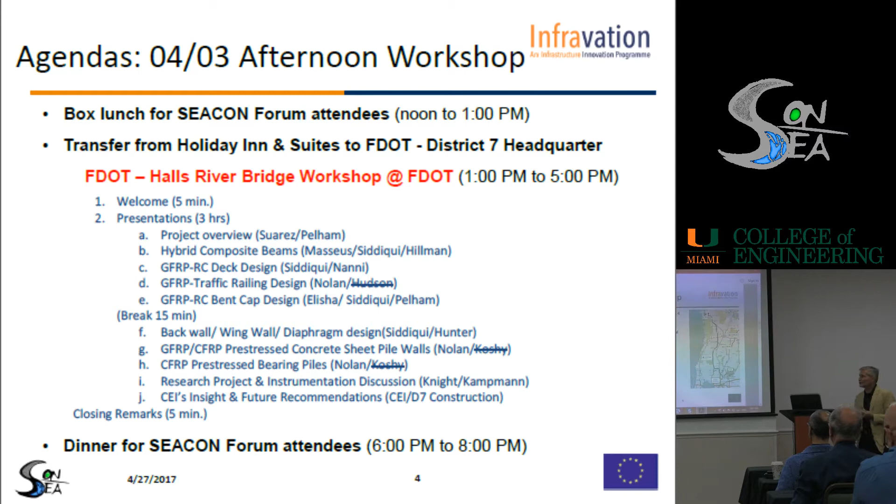So tomorrow, super exciting morning, we are traveling to the site of the Halls River Bridge, and I'm sure that we will all look at the location. It's a pretty long drive, approximately an hour and a half. The idea is just to go there with our own vehicles. So I don't want to spend much time on this. I'm sure that this afternoon we'll have an opportunity to go over it again.

And then finally, in the afternoon, many of you probably don't have much interest in this, but we will have an assessment program. We come back to headquarters of District 7, and the late part of the afternoon, the one indicated as open, is the part that you can attend, the debriefing.

If you wish to be around, great. If not, for the SEACON members, I will give you an update myself at the next monthly meeting that is coming. So with this, I conclude the first part of my outline. I wanted to give you a sense of what's happening in the next 2 days so you can plan accordingly.

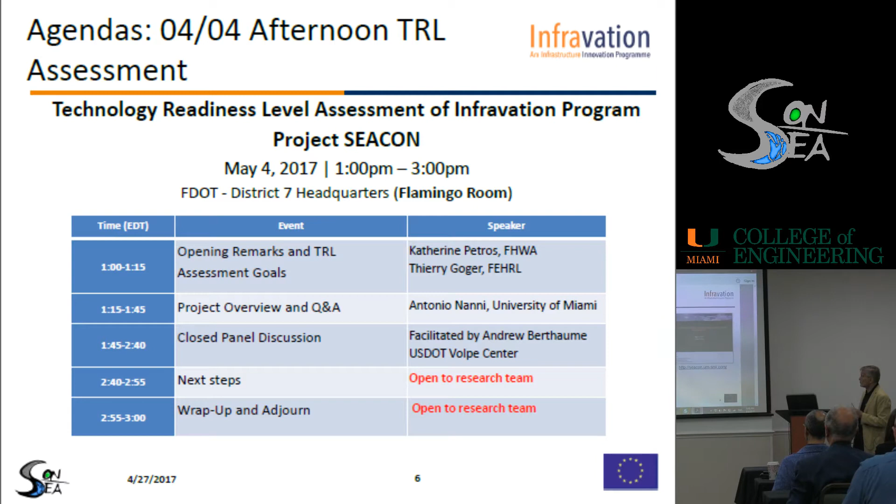Now I want to go into the SEACON project, tell you a little bit about the scope and participants, a little bit about the organization so you better understand the flow of the presentations for the rest of the morning. And then the last slide is more the group, just to lighten up the mood.

So the scope and participants: as you can see from the slide, we have copied this scope directly from the original program. We look at the safe utilization of seawater and salt-contaminated aggregates for sustainable concrete production when combined with non-corrosive reinforcement.

That's a mouthful of terms, but the fundamental issue, if you ask me to put this on a postcard, I would say we are looking at concrete without chloride limits, and making concrete without chloride limits a material that can be used for structures. So it's all about sustainability, and sustainability can be attained by putting together the right two things.

We're delighted to have 9 organizations among the partners and collaborators. And you can see 4 in the US and 5 in Europe. In particular, operations extend not only across the subcontinent but really worldwide.

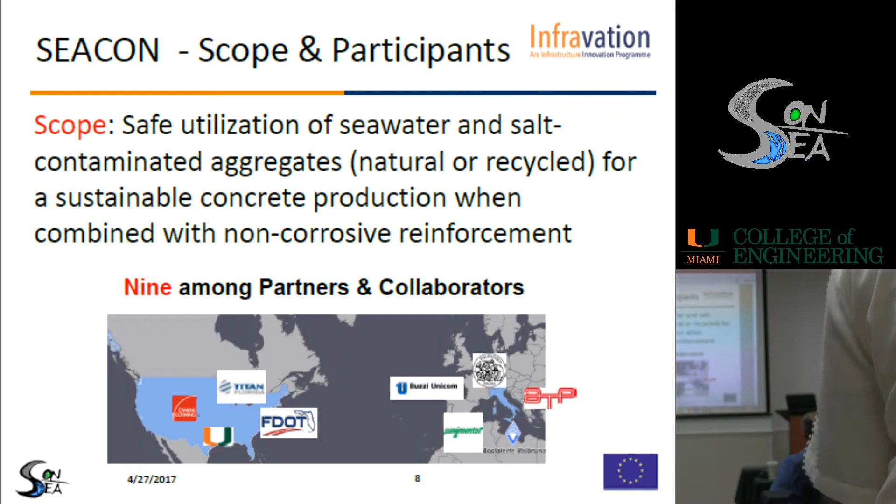This is a very crowded slide, taken from the proposal, but it gives you a sense of the fundamental work packages. In the European methodology of funding projects, the idea of the work package is central to the way proposals and projects are carried out, and we follow the same format.

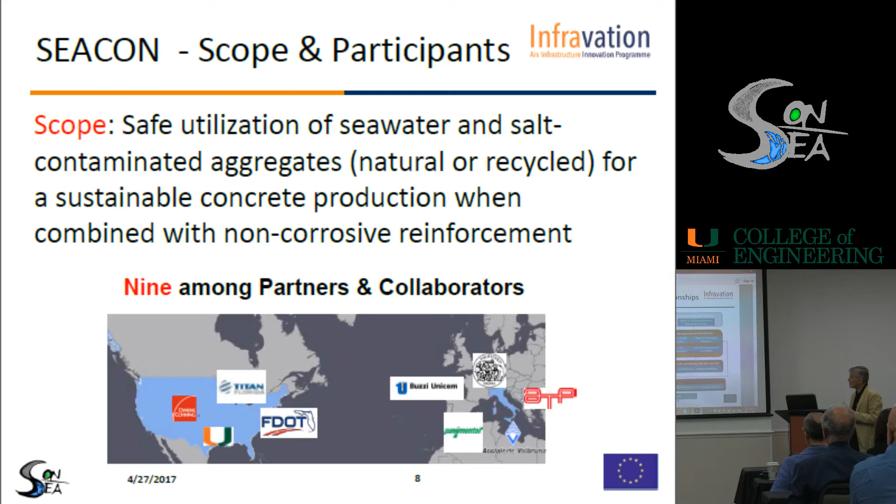So we have WP1, the materials, which is the line above, and then 2 other work packages, 2 and 3, that deal with the reinforcement types, and then WP4 right underneath it, the demonstration projects: one in Italy already completed and under monitoring, and one in the US that is really central to this two-day event. The project in Italy will be presented by Dr. Redaelli later today and deals with the construction of culverts along motorway A1.

And then to tie everything together, we have WP5 that deals with the cost and the life of the structures, and Professor Dotelli is here with us and will give us a presentation. The remaining WPs 6 and 7 deal with management and dissemination, so this is in a sense what we're doing today. This gives you an idea of the timeline. The only thing I want to mention, this is a project that started in October 2015. It will end in March of 2018.

So we are today in the month of May, at month number 20 of the total that we have at our disposal. So we are in the second month of the current semester. So things are converging, and hopefully we are deploying what we have promised.

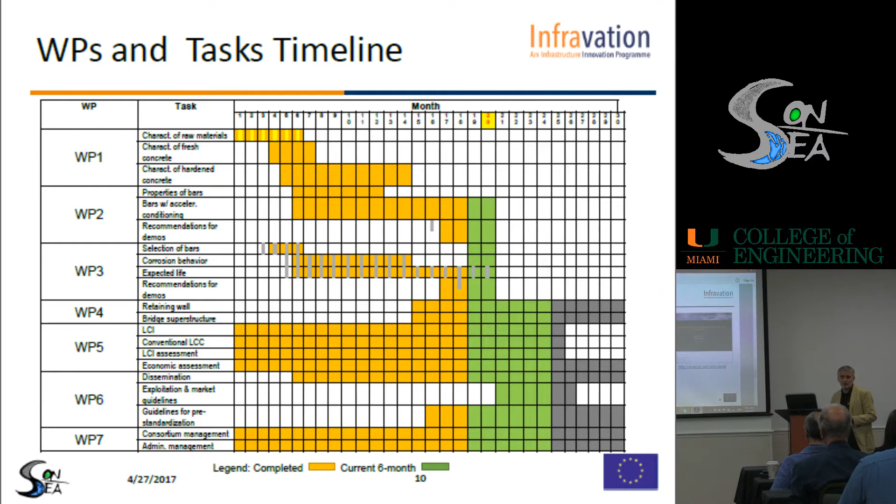The last slide is really a collection. You know that I'm very active in the American Concrete Institute. So one of my dear friends provided me with these pictures. So let me explain the title. Is this an unintended implementation? The point I want to make is we don't have to go up north to see the infusion of chlorides through de-icing salts in our bridge decks.

If you go to this location that is coastal, there is this construction going on, a major structure, with a tide that moves 12 feet. So when the tide is up, and you look at the two pictures on the right-hand side, the foundation is totally covered. And the sticks that you see coming out, these are steel reinforcing bars, black steel. And then when the tide goes down, the picture that is not very clear, taken from a boat from a distance, everything becomes dry.

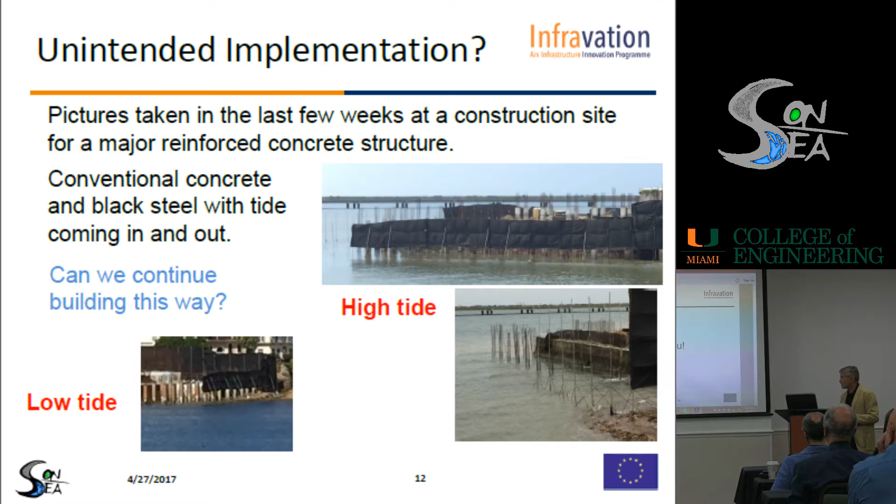So the contamination with the chlorides already happens every day in every structure. What is going to be the life of this? I don't know. If you are in the repair business, you love it. But I think the entire point is what we are doing is really relevant, and I hope that not only with this experience in the next 2 days, but with the follow-up of the work that we have generated, there will be interesting follow-ups. With this, I'm going to close, and we will start with the first presentation.

And maybe Morteza, you want to help with the transition? As I move away, yes, Katherine will come up. You need this, of course. Clip it. So the next, I'll just hold it.

FHWA actually has been extremely active, with colleagues at FHWA, in making this a reality from the U.S. side with Infravation. So we're extremely thankful to her and FHWA for having made this really possible for all of us. Stephanie? Where's the arrow?

So, okay. Well, on behalf of the Federal Highway Administration, I'd like to welcome those of you in the room and those of you online to this forum. I thought I'd just spend a couple of minutes giving a little bit of background as to what exactly Infravation is and how we got here. So Infravation, basically the word itself is a mashup of infrastructure and innovation. And it's a transatlantic research program with the goal to look at advancing innovative near-market materials or processes that are going to make highway infrastructure last longer, perform more efficiently, and hopefully cost less.

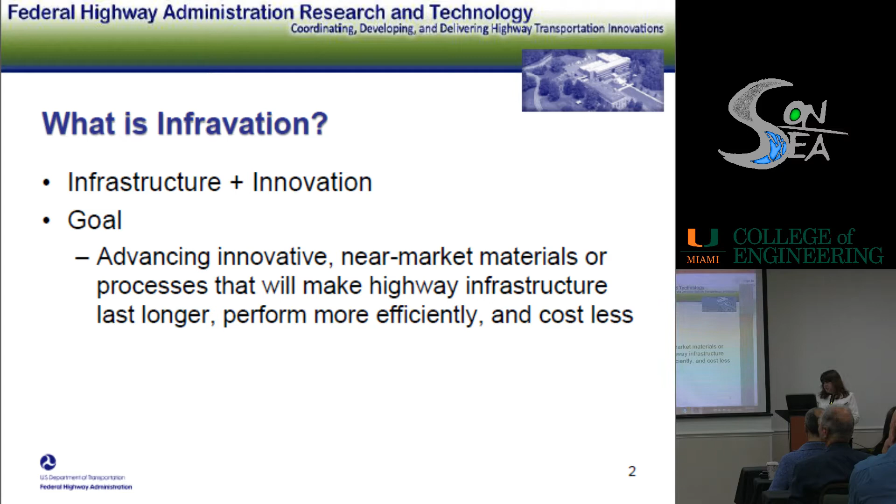So why would we collaborate with the EU? Well, really, highway construction, operations, management, and maintenance is increasingly international. Many of the issues faced on both sides of the Atlantic are common, and there's a lot to be learned from each other. By pooling our resources, we could supplement our own national research budget and the research of the EU road authorities. So we're leveraging limited resources, and it has the potential to increase the scale of the projects that we can complete and increase the potential for success. It also provides access to cutting-edge research from both sides of the Atlantic, so we're promoting knowledge sharing and capacity building from each side.

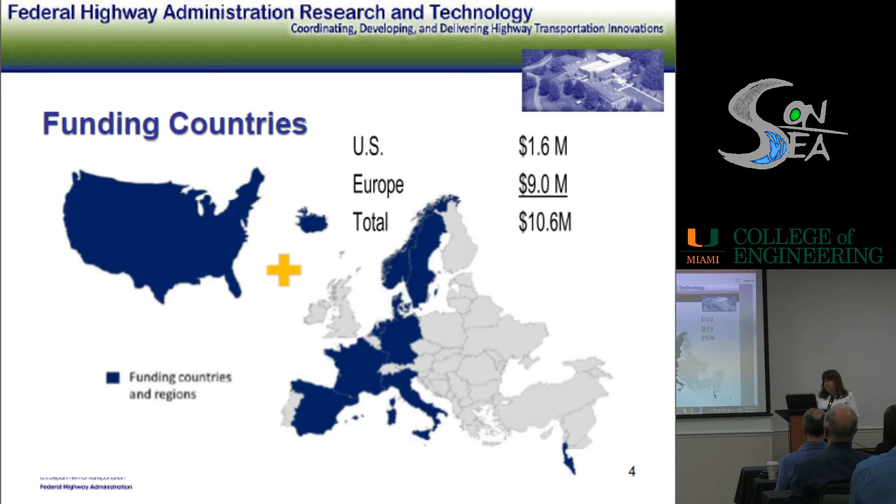So Infravation itself was funded through FHWA in the US, and the countries you see listed here are the European road authorities and the European Commission in general. So we pooled our resources to create a $10.6 million research program. And what's so special about it? This really is a common pot. There was no guarantee necessarily for those who put their money in that their universities or their industry were going to get a return on that.

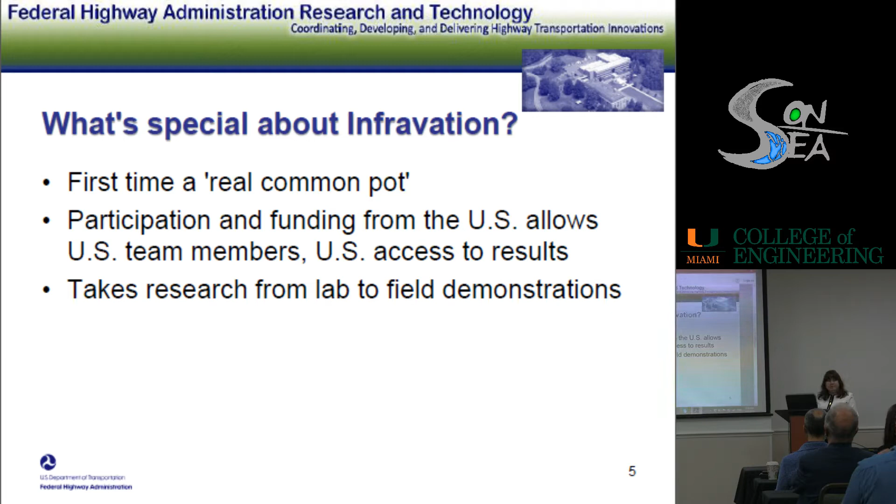The funds were pooled, but by participating, the U.S. was able to allow U.S. universities and industry to propose on projects and have access to the results. And also, Infravation includes an element of technology transfer and an emphasis on implementation. So we'd like to take the research from the lab to field demonstrations such as this one. Some of the Federal Highway objectives in participating are to provide the opportunity for U.S. and European highway researchers to work directly with each other, to assist in harmonizing adoption of new technology and processes, and to provide state DOTs and European national road authorities with common access to innovations.

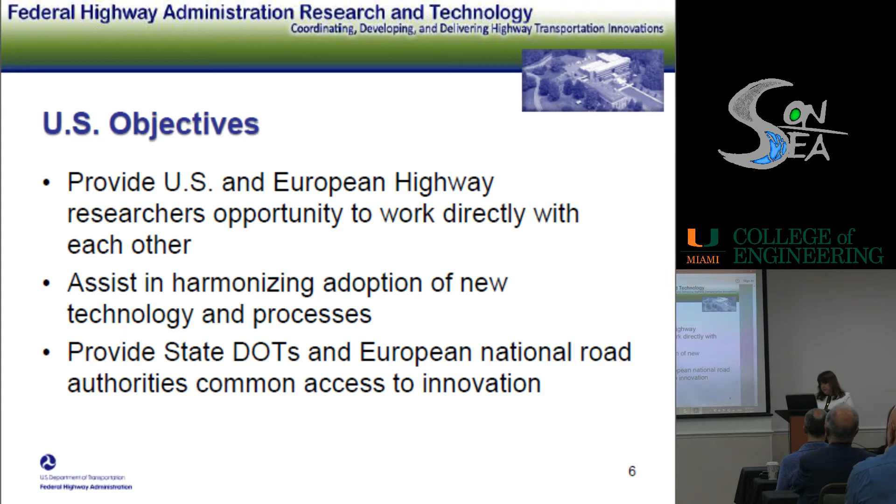So how did we get here? In 2014, based on that $10.6 million pot of money, we issued an RFP, and we received 103 proposals in response. 2/3 of those proposals included U.S. members. Of those 103, nine of them were awarded, and they were initiated in 2015. Of those 9, 7 included U.S. membership. And then SEACON is one of those 9 projects that was awarded.

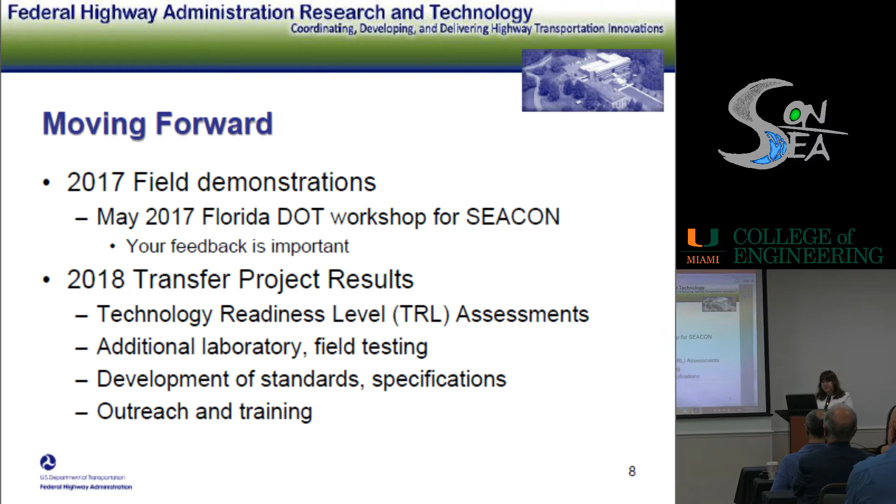And then, as Tony mentioned, there's also going to be a formal technology readiness level assessment following the workshop. And so combining the feedback we get at this workshop, we'll take an assessment in terms of, is there additional laboratory or field testing that's needed? Can we move towards the development of standards or specifications? And then, of course, continuing outreach and training. So with that, I thank you, and we'll welcome your input.

I don't know if there is any question for Kathy. She brought us back into the good part of the agenda, meaning in terms of the time. I don't know if there is any question for her.

Kathy, the 9 projects, have they already been identified? Yes, they're ongoing. Many of them are in final stages now and wrapping up. So in the next year or two, we'll see the outcomes from those projects. And the technologies are different technologies or all related to the fiber? No, they're across the infrastructure spectrum. So the money is already committed there. Yeah.

Actually, just a comment. We are hoping in a phase 2 of Infravation. That doesn't guarantee anything to the existing program, but I think it's a very exciting idea. And if you go to the Infravation website, you will see a host of activities. Yes, infravation.net.

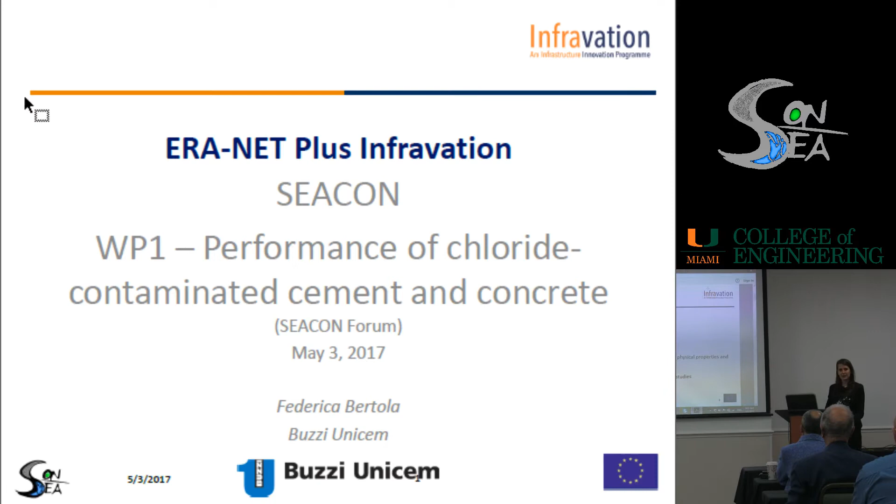Okay, good morning all. My name is Federica Bertola from Buzzi Unicem, and I will present you today the WP1 activities and results, particularly related to the chloride effect on both cement and concrete. So the following are the outlines of my presentation. The main duties that Buzzi Unicem has in the project, a brief overview on the European standard related to cement and chloride limits, then the cement that we produced for the SEACON project, the effect that chloride has on the cement hydration, on the physical properties, and on the microstructure, a very short introduction to the ongoing durability studies, and finally the conclusions.

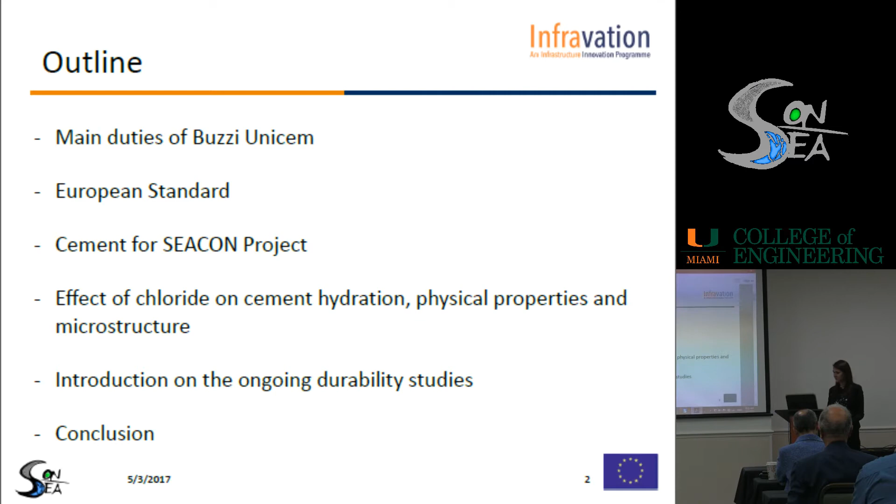The main duties that Buzzi Unicem has on this project are, first of all, the production of a dedicated cement for the project, and obviously its characterization, the understanding of the effect that chloride from different sources can have on both cement and concrete, the project of different mix designs for the demonstrator construction, durability studies, and taking part in the Italian demonstrator.

First of all, a brief overview of the European standard to understand the difference between the European regulation and the US one. So here you can see the table with the 27 different cements produced and regulated in Europe. They all include different and variable amounts of clinker, gypsum, and other supplementary cementitious materials that can have or not hydraulic or pozzolanic activities, such as blast furnace slag, silica fume, and so on. So in Europe, there's this trend to add materials during the cement production.

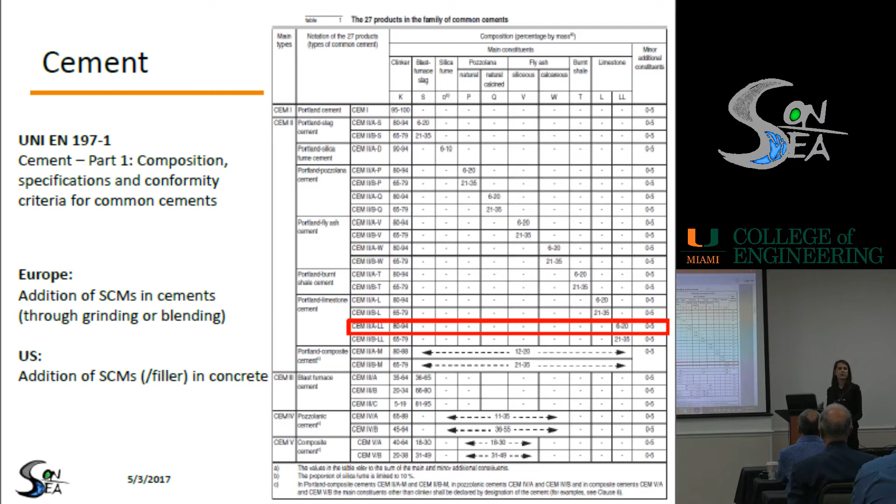And here, the red highlighted item is the CEM II/A-LL, the Portland limestone cement that is considered for the entire study. Another important thing in the European regulation is the chloride limit. We have a chloride limit equal to 0.1%, and it's different from the US because you don't have a limit. So this is particularly important for cement producers because we have to control carefully the production of cement to not exceed this limit.

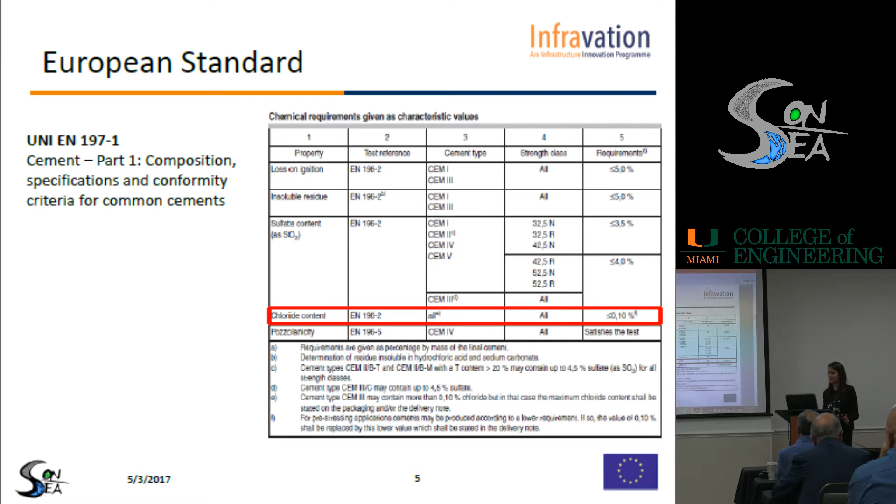So in particular, when we use waste material as an addition in cement, we have to control carefully this limit. So here, the two cements that we consider in the study: a reference cement, a Portland cement CEM II/A-LL 42.5, that is commonly produced and sold in Italy.

Then SEACON cement. We produced a dedicated cement, as I already told you, for this project, using in this case cement kiln dust in partial substitution to natural limestone. In fact, this is a waste material coming from cement production, and its reuse is limited by its chloride content. In fact, you can see from the table that SEACON cement has a chloride content of 0.23%. The limit is 0.1, so it exceeds the limit, and is much higher compared to the chloride content of the reference cement, that is 0.02%.

So we performed the characterization of the two cements to understand the effect of this very high chloride content, and we can see that the main effect is on the setting times. So we can say that the high chloride content can have an acceleration effect in this case. But we decided to continue this investigation, so we produced pastes, so cement plus water, and we considered the two cements with both fresh water and seawater to understand the effect when chloride is present in water, in cement, and in both water and cement.

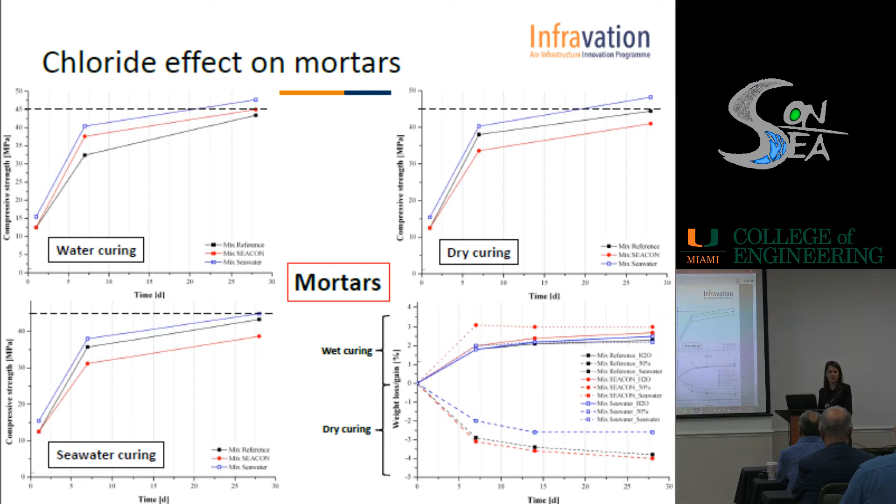As we can see from the graph, the chloride effect on the compressive strength is not so important, except for Mix SEACON. In fact, in this case, when chlorides are present in the cement, we have a slight decrease in the compressive strength, particularly in the case of seawater curing. And this could be due to the higher absorption of water that you can see from the fourth graph. Then another important thing is that, considering the loss of weight in dry conditions, Mix Seawater has the lower loss of weight. Maybe this is due to the fact that the pores are full of salts in this case, and so the loss of water is lower compared to the other two cases.

Then we designed the different mix designs, three in this case: Mix Reference, Mix SEACON, and Mix Seawater. The first one as reference, with reference cement and fresh water. The second one with SEACON cement and the addition of superplasticizer, and Mix Seawater that needs also a retarding agent due to the acceleration effect of chloride. We designed them considering a fixed compressive strength of 45 megapascals at 28 days and also the desired consistency.

Another important property to check is the drying shrinkage. So we performed it in both concrete and mortars to have a comparison. We produced samples, cured them for 24 hours in wet condition, 95% of relative humidity, and then we stored them in dry conditions to see what happened.

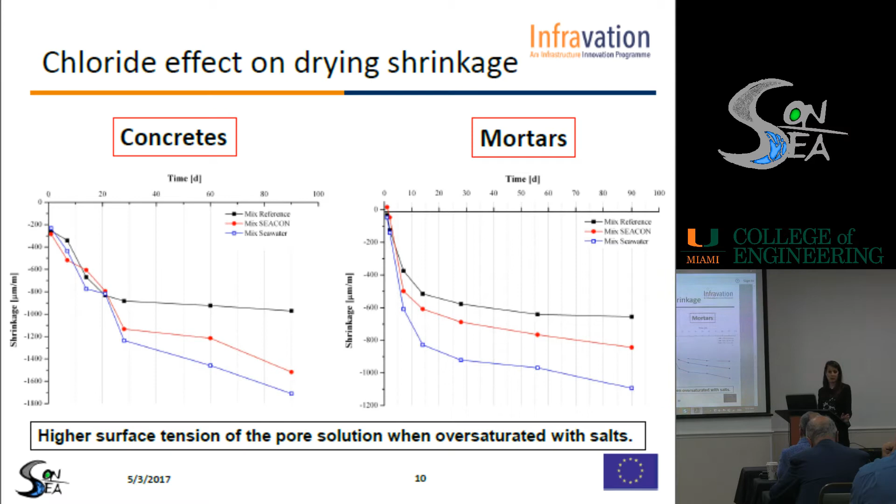We decided also to have some information about the microstructure to better understand this behavior, and so we considered two different techniques, the SEM and the MIP, to understand the microstructure and the distribution of the pores inside the material. So we produced the same mortars that I told you before, so mixed reference, mixed seawater, and mixed SEACON, and we stored them first in water for all the time that we performed the investigation.

Then we produced the same mortars and we stored them in dry conditions at 50% of relative humidity to see what happened. And from the pictures you can see that the mixed reference has also in this case the best structure. So the hydrated phases are recognizable also in these cases, but the structures are different from the other one. So we performed MIP also in this case, and we can show that mixed reference and mixed SEACON have a bimodal distribution. They have two different families of pores in this case.

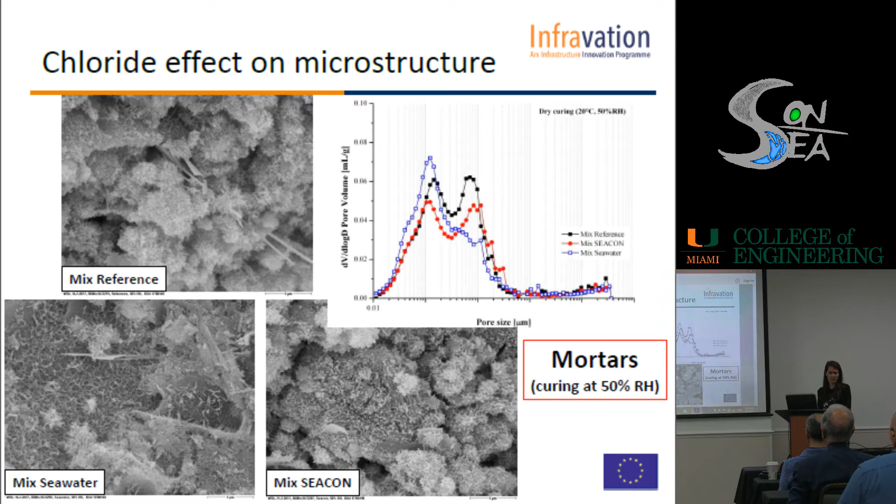The first one is around 0.01 micron and is typical for this type of materials. Instead, the other one is around 0.1 micron, so bigger pores, and this is completely different from the other case, so water curing, because in this case the development of the hydrated phases is not complete. So the bigger pores are in this case empty, except for mixed seawater. In this case it doesn't have the bigger pores due to the salts that precipitate in them, closing them.

So a brief overview of the ongoing durability studies. We are performing tests on the resistance to sulfate attack, because it's very important to understand if an ionic exchange between chloride and sulfate can happen. Then we are checking if an alkali-silica reaction can occur, because alkalis are present in both seawater and in kiln dust, so we would like to check if it can occur.

And then a leaching analysis. This is important to understand if a concrete contaminated by chloride can also contaminate, with a release, the surrounding soils, and so the surrounding structures, probably with corrodible steel as reinforcement.

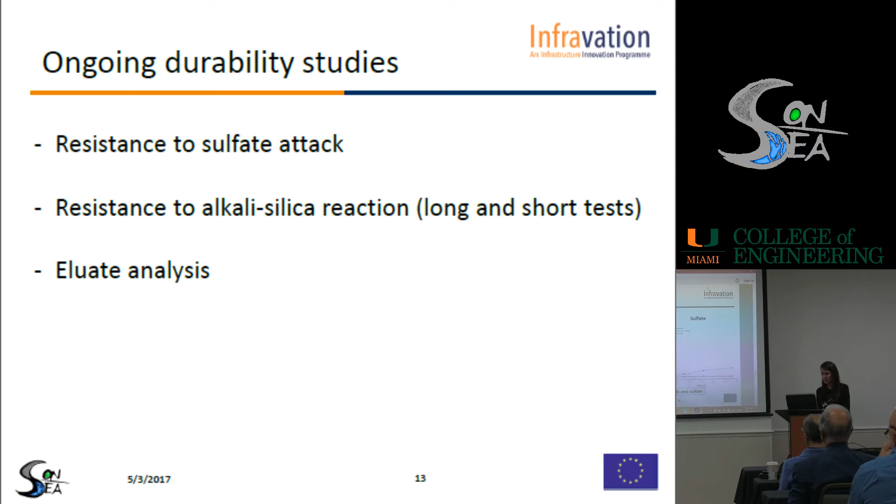So we performed this test producing the 3 concretes that I told you before. We produced cubic samples. We stored them for 28 days in a wet room, and then we submerged them in a fixed amount of deionized water. And at different times, we extract the water, so the contact solution, and analyze through ionic chromatography the release of chloride and sulfate in water.

Instead, for sulfate, this is different because we have to consider the possible ionic exchange between chloride and sulfate. So when chlorides are released, sulfates aren't, and the opposite, when chlorides are not released, sulfates are. In fact, mixed reference results in a higher release of sulfate because probably they are not bound as in the other 2 cases.

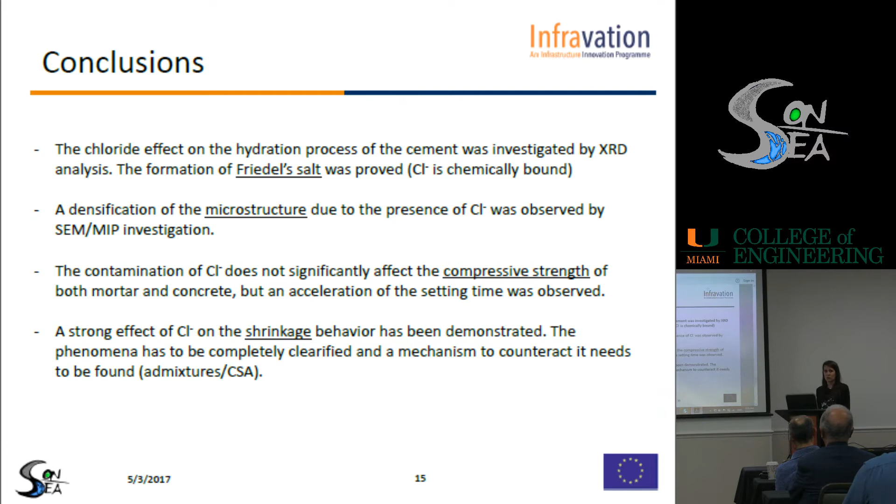We wrote 2 different papers. The first one was published in Advances in Cement Research last June, and the other one will be presented at the 14th International Conference on Durability of Building Materials and Components at the end of this month in Ghent.

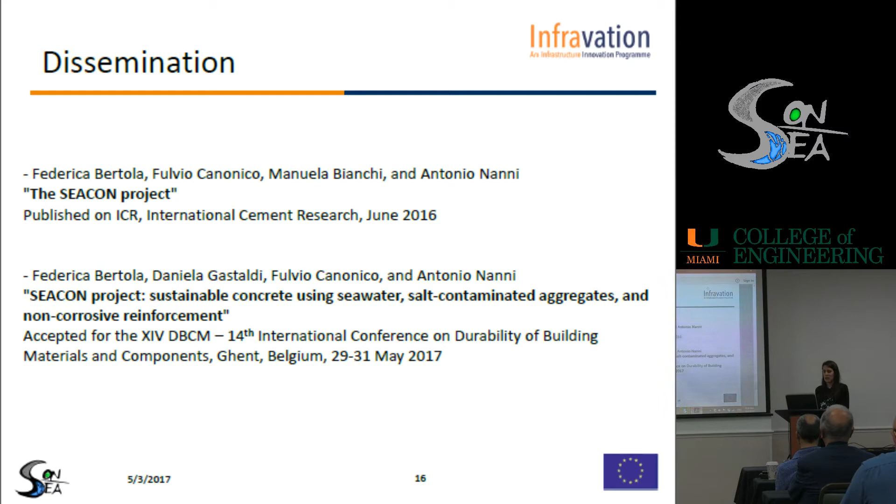The producer told me that I have to be on this side, otherwise I cannot work. So that's the only reason I'm coming. Any questions for the excellent presentation by Federica? There will be a quiz on the chemistry of cement after.

All right. Now, the chloride. I know in this project that we're working on, the Halls River Bridge, we use a fiber rebar, which the chloride should not really be affecting the performance of this material. But let's say we use it with conventional rebar, steel rebar. Would that work in this case with the chloride content? I don't think so. We need to use a different kind of rebar to permit the higher chloride content.

And this is the objective of this work, this project. So it will not work with conventional steel, yeah, because it can create corrosion. Actually, not the next presentation, but the one coming from Politecnico will address this issue of corrosion of black steel or carbon steel in a very high chloride content.

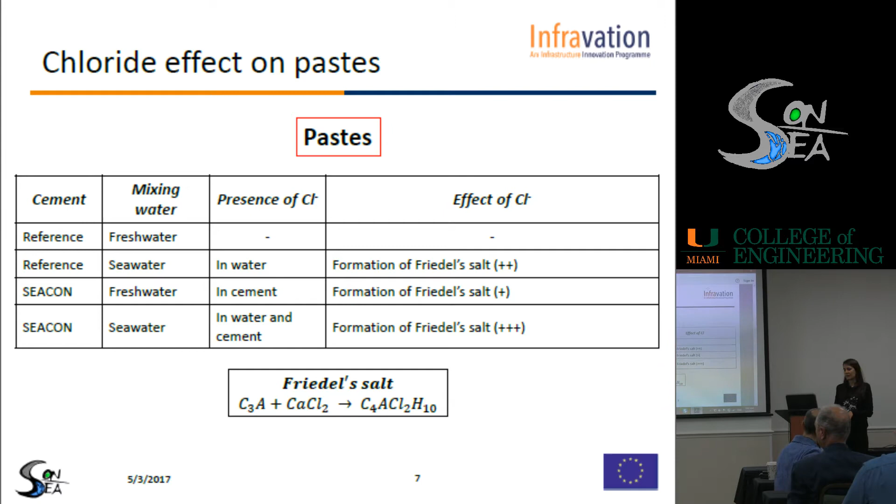Waste materials such as kiln dust, the price is lower. So I think that SEACON cement will cost less compared to the reference one, a normal cement, because we can reuse materials that instead have to go to disposal. No. I think 10% less, but I'm not sure about it. Maybe a question for the producers.

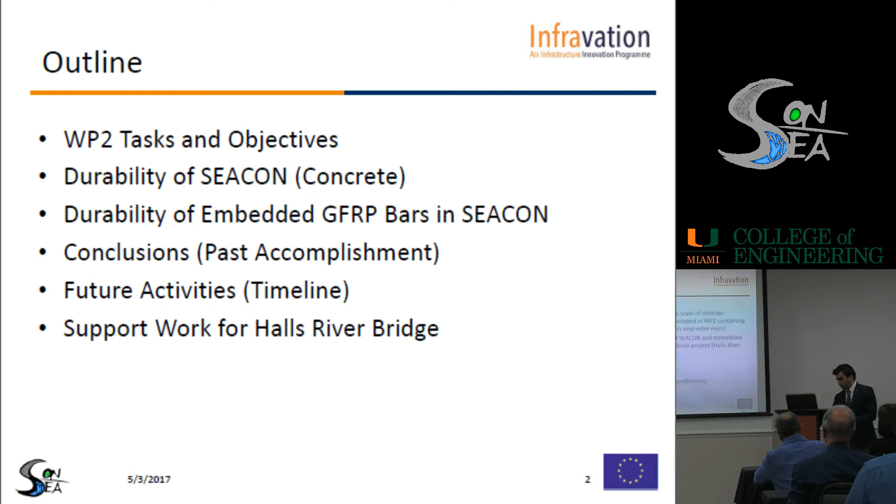Okay, so what is WP2? WP2 is we want to make sure that the concrete that our colleagues in WP1 cast is going to be okay for our GFRP bars. It's going to be good, so it's not going to affect our GFRP bar durability. And the output is going to be an evaluation of the expected life. So we want to make sure that the lifespan of our structure using SEACON plus GFRP bars is going to be guaranteed over at least 100 years.

And then the tasks: the properties of the GFRP bars, for sure the pristine bars, to test them and then use them as a benchmark. And then we actually use reinforced samples using the new type of concrete, which is SEACON, and we're going to see how it's going to perform. And then also for sure we're going to have some recommendations for the demo project, which is going to be the Halls River Bridge.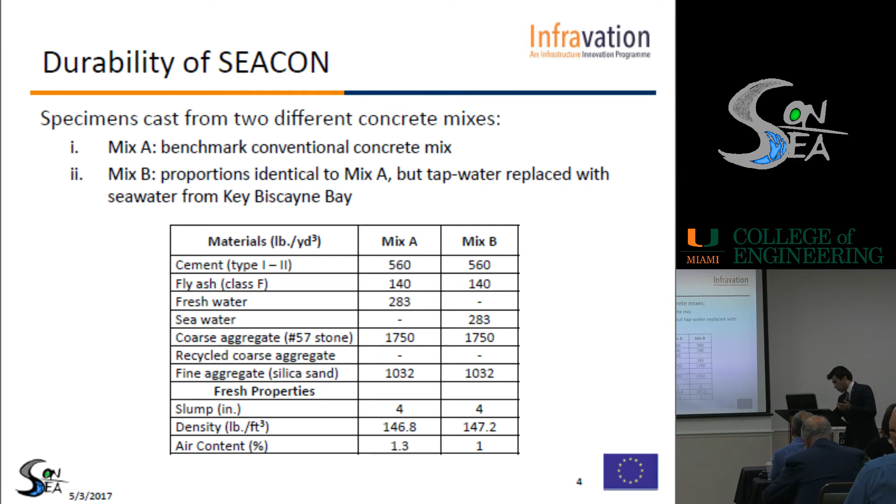And then what we did for mix B, which is our seawater concrete, we just replaced our fresh water in the conventional concrete with seawater. That's the only difference in mix B. But for sure, because of the chloride content of your seawater, it's going to affect your setting time. So you have to use different kinds of admixtures, for example, retarders, to control that. And you can easily do it by using different kinds of admixtures, mainly retarders.

So over here, we actually cast some samples 2 years ago. Before the official start of our project, we cast samples from mix A, which is a conventional concrete, and then mix B. So we cast them, and then we exposed them to different environments to make sure that they are durable in both environments. So the first environment is just outside our lab in Miami, Florida, so basically a tropical environment, and the good weather in Miami, right?

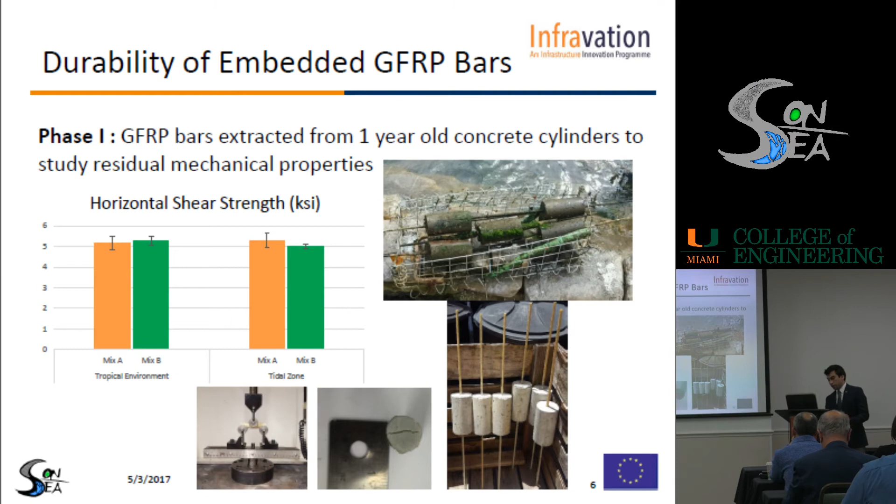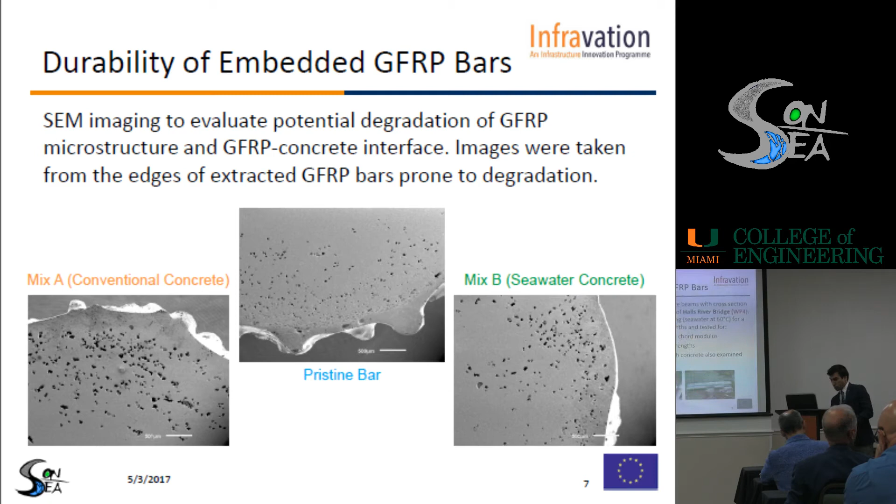So this one was phase 1. Then we officially started the SEACON project in October 2015. At that time, we started casting more samples. We embedded GFRP bars in these types of beams. These beams are about 6 feet long, and the cross-section is 6 by 7.5 inches.

These were supposed to be the same as the test blocks that we have at Halls River Bridge. The main idea was to have some samples in the lab exposed to accelerated conditioning, so we're going to have test results in the lab and also in the field, and it's going to be easy to compare.

And as you can see here, we casted those samples. They have 4 number 5 GFRP bars. And then we expose them to a condition called accelerated environment. And what is it? It's seawater at high temperature, 60 C or 140 Fahrenheit. So that's actually what it does.

If you want to really study the durability of GFRP bars, you have to wait for 20, 50 years, go to the bridge, take your sample, and then test it. For sure, you don't have that much time, right? So the best way is just to accelerate everything. This is like a time machine. So you just put it in that seawater chamber, you leave it over there for a year, and then you take out your samples, you extract your bar, and you're going to test your bar.

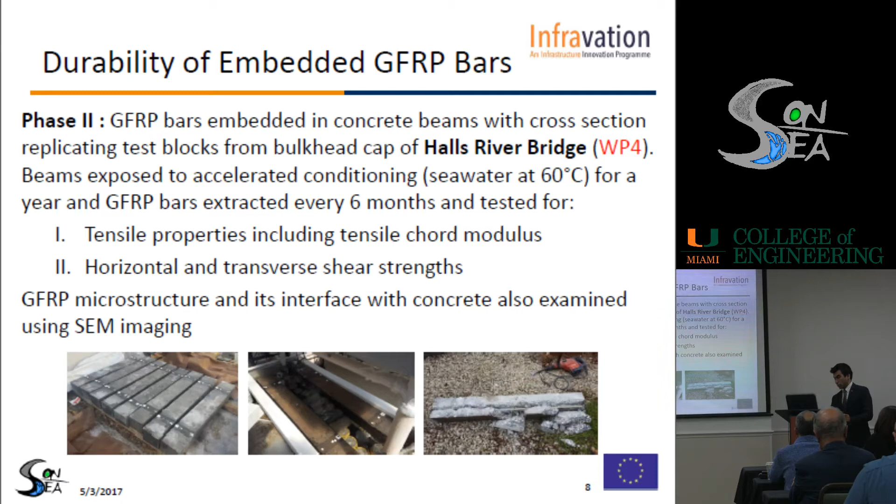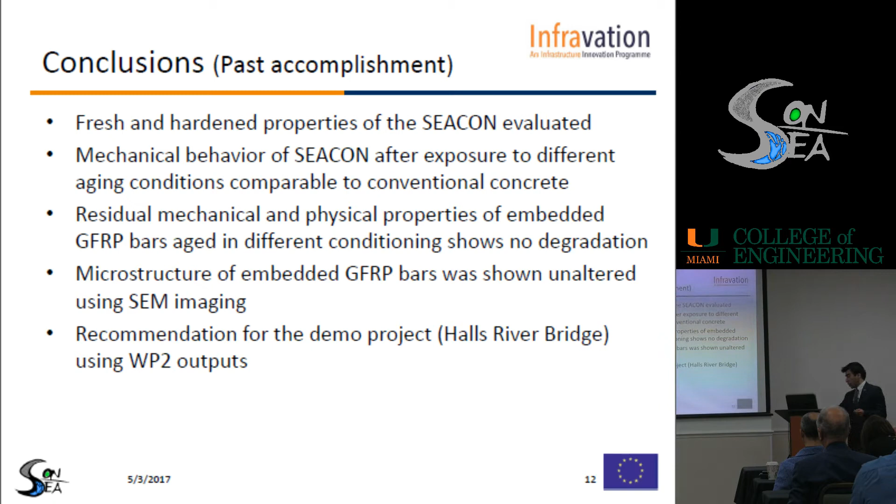And then microstructure, SEM imaging didn't show anything, so no impact actually on the microstructure of the GFRP bars due to using the seawater concrete. And then for sure, we are using all these as recommendations for the demo project, which is Halls River Bridge, and we're going to all see it tomorrow.

So what we're going to do in the future, we're going to focus more on seawater concrete, see what it has that's going to improve actually the property of our GFRP bars. So we have to do some tests on the concrete by itself. So kind of get involved more with WP1 and work on the durability of the GFRP and make sure that everything is all right in the concrete. And then by doing that, we're going to understand why the property of our GFRP bars is going to improve by using seawater. And also, we keep going with our other tests on our GFRP bars.

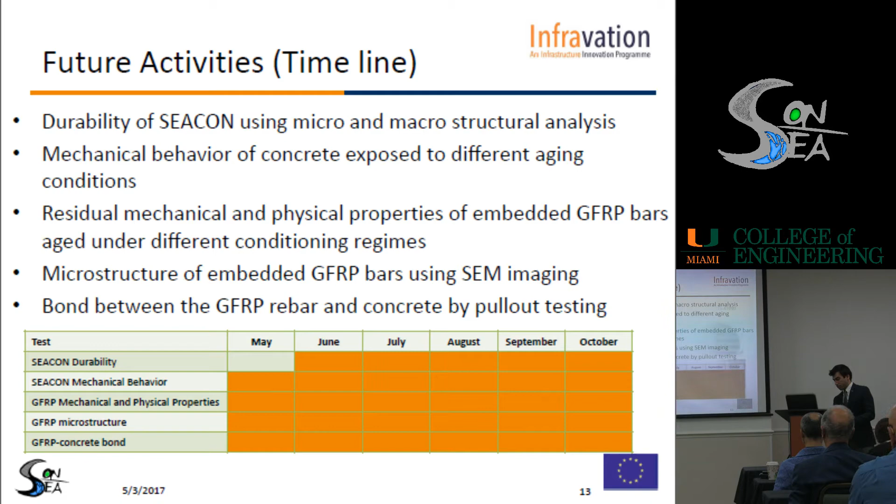So I'm going quickly over what we have done as support work for our colleagues in Astaldi and our colleagues involved in Halls River Bridge. So we actually designed the concrete mixture designs that they're going to use in Halls River Bridge. And so after designing it, we went to Argos ready mix plant, and they were kind enough to have us over there. And with an FDOT representative, we did all the trial batches, and they all got approved.

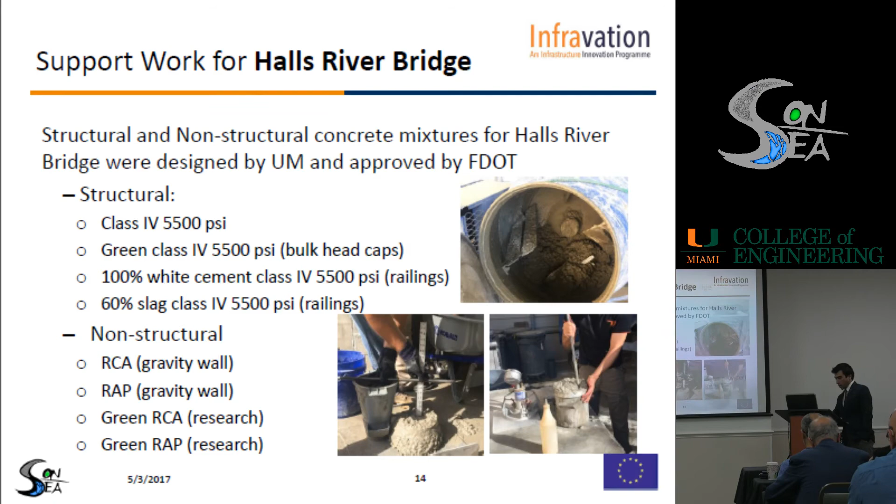We call it green RCA and green RAP, which is going to be super green because you're going to use seawater and also recycled aggregate in it. Really sustainable concrete. So that's what we have done. And we did all those tests for sure when we got the aggregate, the RAP, and RCA. When you want to design a mix, you have to do all the aggregate property tests. I mentioned those over there.

And also the seawater, you have to make sure what you have in your seawater, because there are lots of chemicals. It's not only salt, it's not only chloride. You have magnesium, you have potassium, all those. You have to make sure how much you have. So in the future, when you want to go back and see what happened to your concrete, you can easily follow and track what changes have happened because of what chemical element.

And then, with the help of the RCA and RAP provider that we have actually in the room, we delivered the seawater and also RCA and RAP to the ready mix plant in Brooksville, the Argos ready mix plant, and hopefully they're going to start pouring the concrete soon, and we're going to see it on the job site. So with that, I'm going to conclude my presentation.

Before we open the floor to questions, I also want to recognize the companies that are participating in the Halls River Bridge project that are not necessarily the partners and collaborators of the SEACON project itself. So obviously, Astaldi as a general contractor, and we have representation here, and tomorrow we'll hear much more. We have Argos here that obviously is providing the concrete, and Morteza made reference to that.

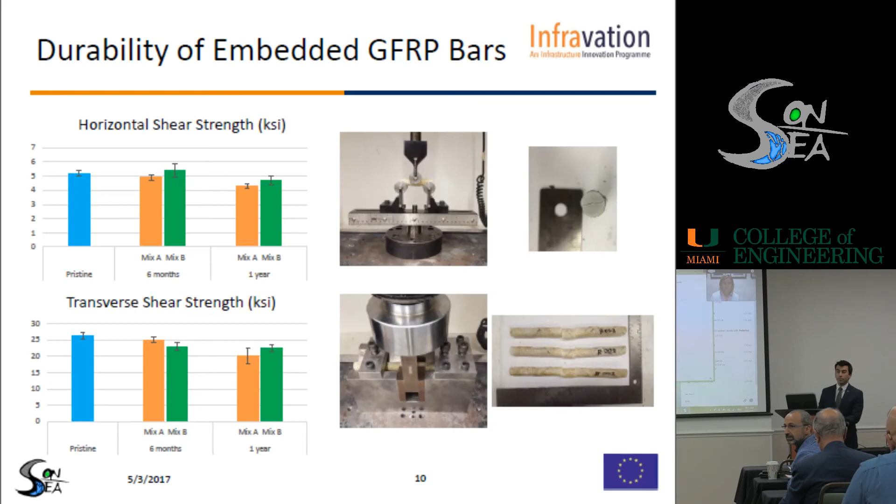Any further questions? Yes? I just want to follow up on input. On slide 9, I think you showed the performance of the bottom 2 mixes. Let me open that. But it was only the performance regarding mechanical properties. When you extract the bar, and I believe that's what I'm saying, follow up to when you actually... So the moisture content of the concrete and also the bar? And or the bar.

No, we just do it on the bar, not the moisture content, because your concrete is going to be fully saturated. It's like 1 year in seawater. We have two different mixes. I don't know if the level of saturation is going to be the same. That's what I'm trying to say. What affects the bar will be either the concrete itself or the conditions. Yes, right.

We did some tests, and what we did actually was measure the chloride diffusion of the concrete. So for both concretes, right now we have the results for how much chloride gets into your concrete and to your bar level. After 6 months, the chloride didn't get to any of it, because we have 2 rows of the bar, one at the top and one at the bottom. But after a year, right now, we get some chloride, not in a really high content, but we have some chloride that got to our rebar.

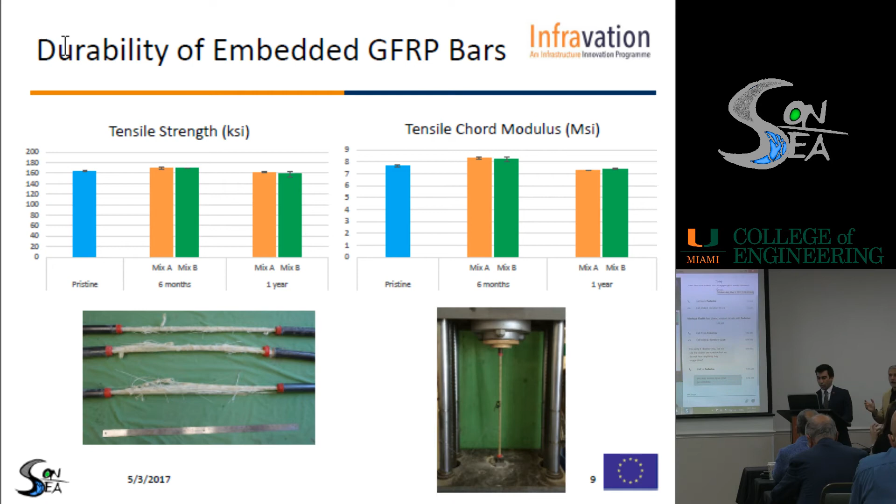Now we go to a very difficult part, meaning from, let's say, the ability of us to be efficient. So production here is the trick. The colleagues at Polimi are physically in Milan, and they will join us through Skype, and we are trying to also project that. By the way, if you see me playing with my computer, it's because I'm watching the presentation through YouTube, so I can see the slides there as well. So I leave this to Morteza to make the connection.

Let me introduce Dr. Lollini. Federica Lollini is ready to go, and then after her presentation, we will have a second presentation from Polimi. This is before the break, and Dr. Redaelli will be making that presentation on WP 4.1, which is the demonstration project in Italy. So we're ready to go with WP3, the corrosion tests on concrete specimens reinforced with stainless steel.

Okay. Federica, can you hear us? Hold on. No, I mute her. Oh, mute her, okay. We're getting there. Okay. Yes, beautiful, thank you. Try to speak as loud as you can, and if we cannot hear, I'm sure that we can figure this out. Yep, maybe you want to close the other window. Yeah, you can start, but hold on. Okay, that's fine. Do you see my presentation? Yes, we do.

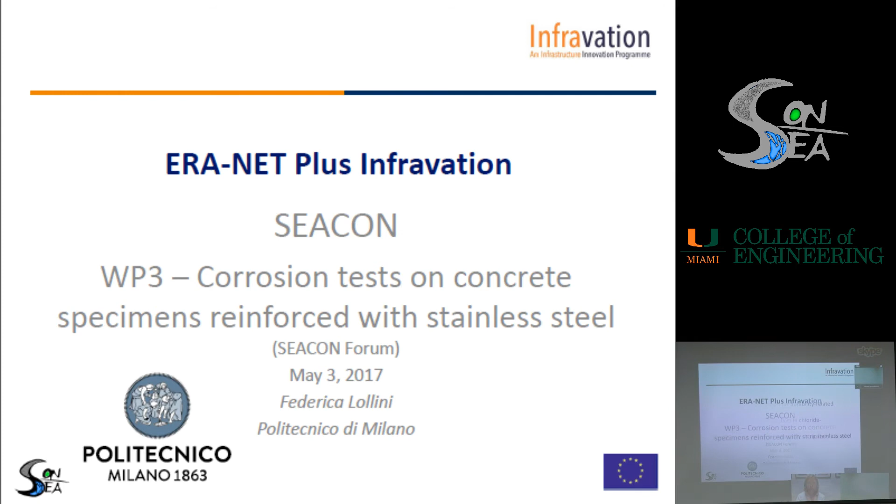The activity carried out at Politecnico di Milano on WP3, and in particular the corrosion tests on concrete specimens reinforced with stainless steel and carbon steel bars. The outline of this presentation is a brief introduction, followed by a brief characterization of concrete for durability related properties, and then the core of this presentation is about the corrosion behavior of carbon steel bars in chloride contaminated concrete, and the corrosion behavior of stainless steel bars embedded in chloride contaminated concrete, and then some final remarks.

In conventional concrete, that is a concrete made with virgin constituents, the chloride content is negligible and below the standard limits. So, thanks to the microstructure and the pore solution composition, carbon steel bar can be passivated. Then, in time, aggressive agents can penetrate into the concrete, leading to the breakdown of the passive layer, and so initiation of corrosion occurs, followed by the propagation time, which depends on environmental actions.

What happens if virgin constituents are replaced with material contaminated by chloride? So it means one of the constituents has a higher amount of chloride above the standard limits. The chlorides inside the concrete may affect the microstructure as well as the pore solution composition, and so the passivation of the carbon steel bar may be affected. And the presence of chloride inside the concrete may lead to early corrosion initiation and may affect the resistance to penetration of aggressive agents. The durability of SEACON concrete can be improved by the use of stainless steel reinforcing bars. It's well known that the passivation of this type of bar is improved, as well as the resistance to depassivation.

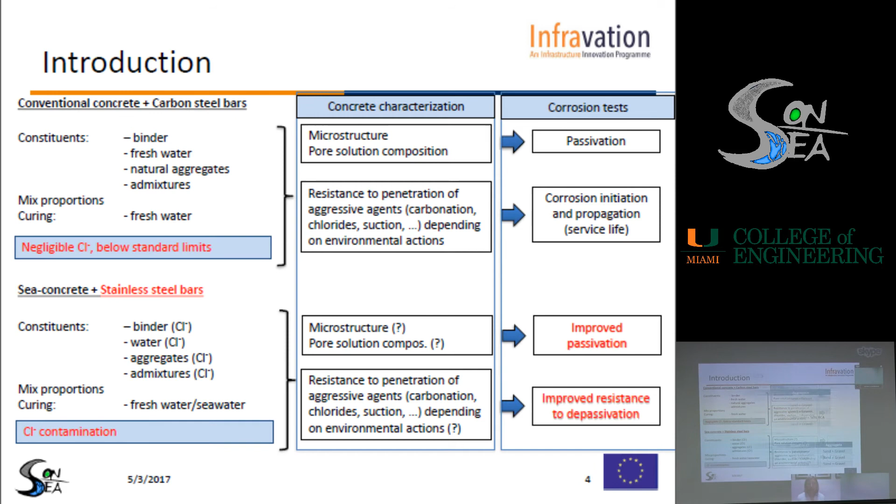So, in Politecnico di Milano, we carried out several tests to characterize the concrete, so to study how chlorides affect the resistance to penetration of aggressive agents, as well as the microstructure and so on, and corrosion tests to investigate the corrosion behavior of both carbon steel and stainless steel bars. Several mixes were made: a reference mix with virgin ingredients, Cem and Cem-FA mixes where the cement was replaced with the SEACON cement that Federica Bertola talked about in her presentation, the Sea mix where fresh water was replaced by seawater, and the RCA mix in which part of the coarse aggregates were replaced with recycled aggregate, obtained by crushing all the contaminated concretes.

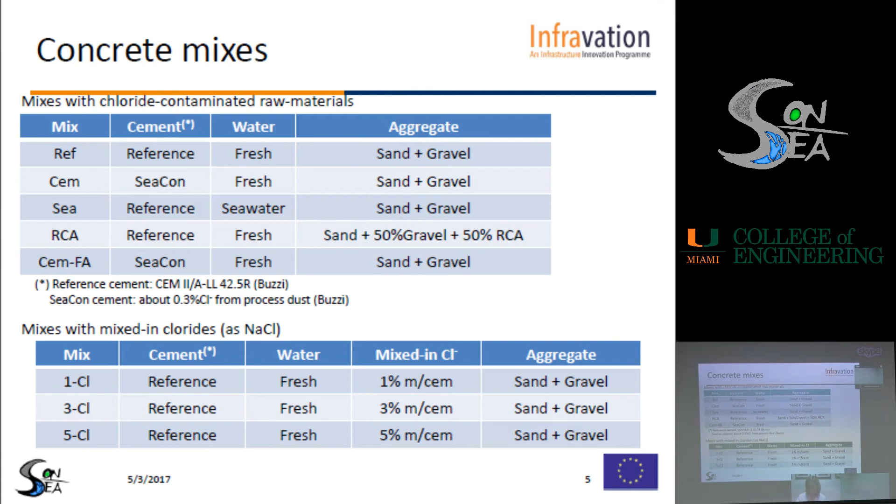Besides these, mixes with mixed-in chlorides were also cast, in which the chloride content ranged from 1 to 5% versus mass of cement. This table reports the mixes and the properties of fresh and hardened concrete. The 8 mixes were cast with a water cement ratio of 0.52 and a workability of S4. Compressive strength was tested after several days of moist curing, and an effect of chlorides in the mixes was observed in the compressive strength measured after early curing, and some specimens were also immersed in seawater after 20 days of moist curing. Curing in seawater may affect the compressive strength when the exposure time increases.

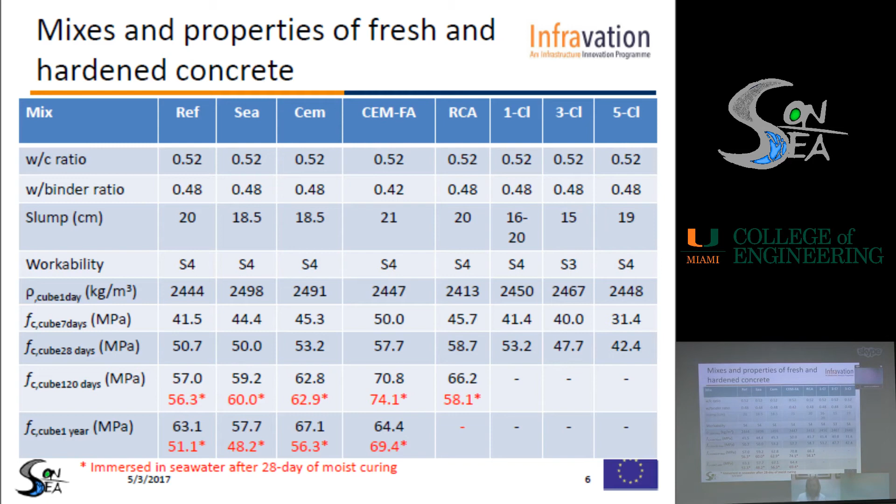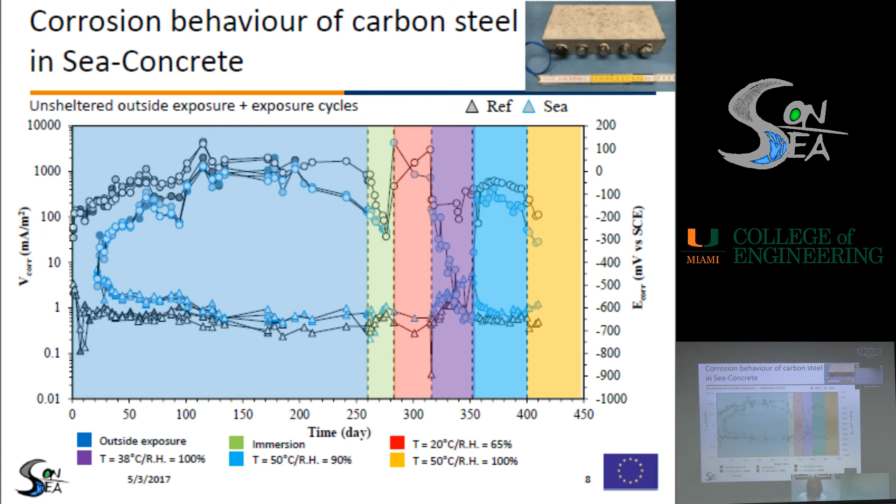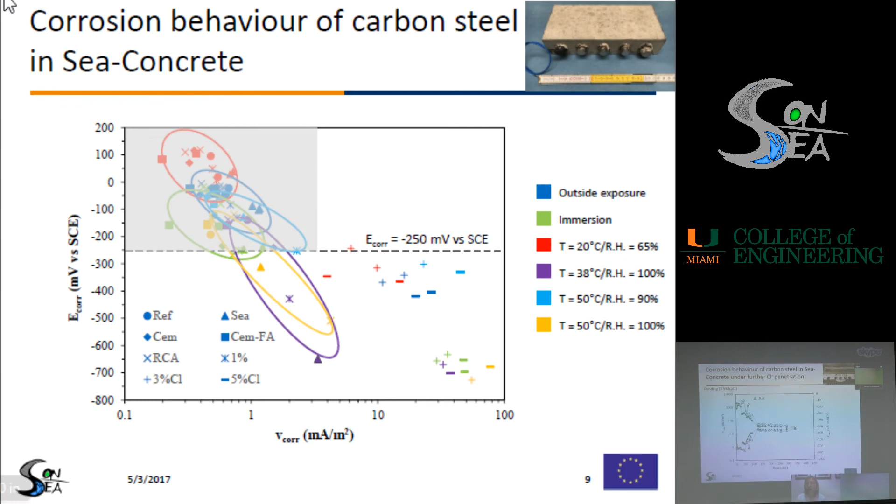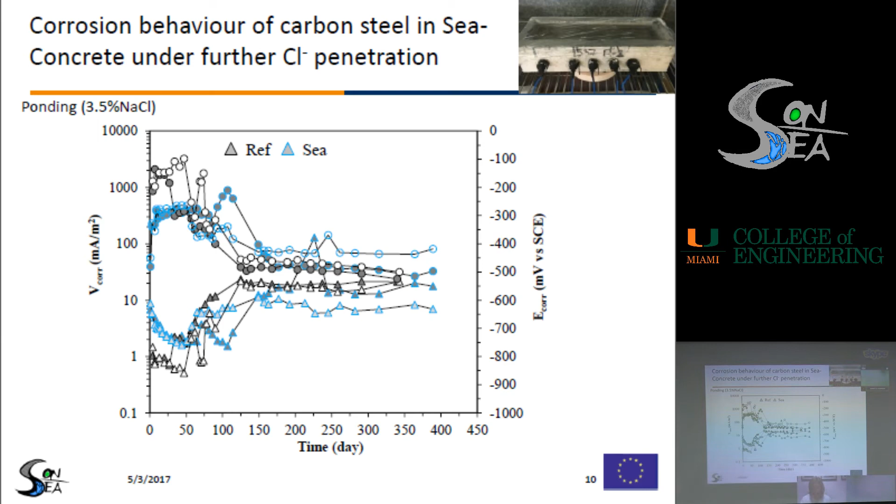So in 1 year, corrosion occurred on all the carbon steel bars embedded in all the types of concrete, indicating again that the carbon steel bar was unsuitable to be used in combination with sea concrete. So an option is the use of stainless steel. In the work, 4 different types of stainless steel were considered. These steels differ in the microstructure and the chemical composition.

So we consider 2 austenitic stainless steels, the XM28 and the 304, and 2 stainless steels with a duplex structure, 2304 and 2205. The mechanical strength of the stainless steel is equal to that of carbon steel, but they have a higher corrosion resistance. They are passive in carbonated concrete, and the amount of chloride which promotes the initiation of corrosion is much higher than that of carbon steel bar.

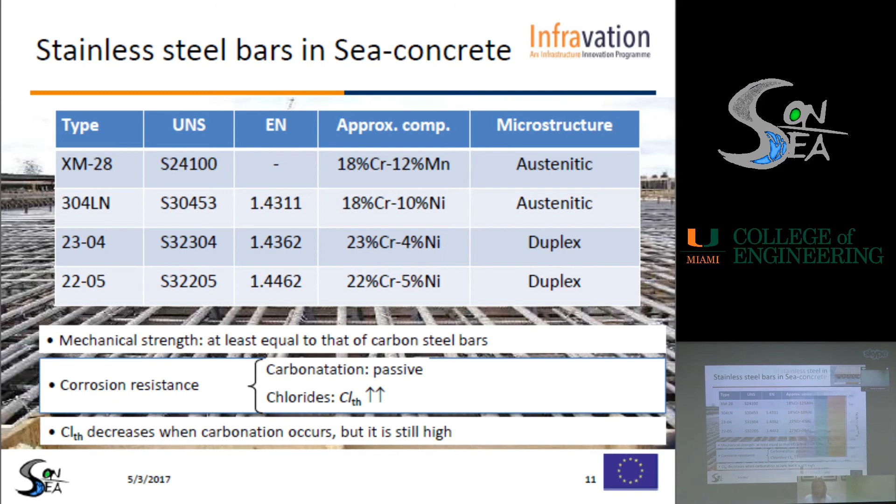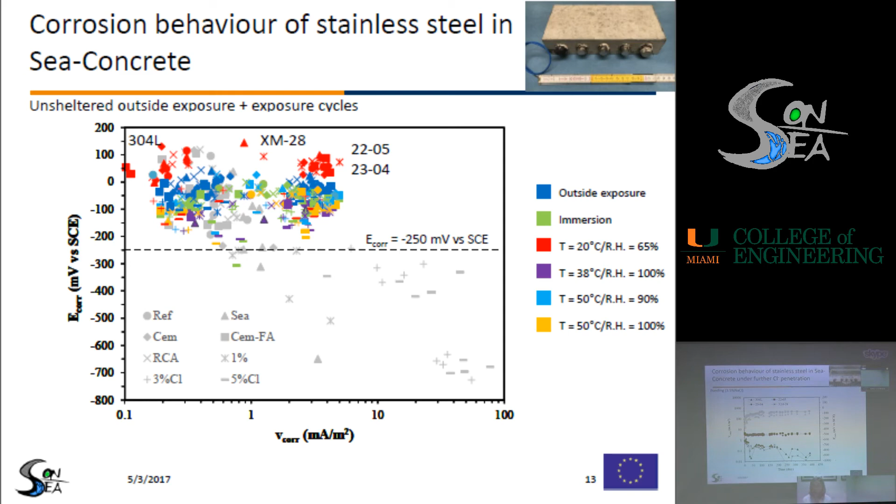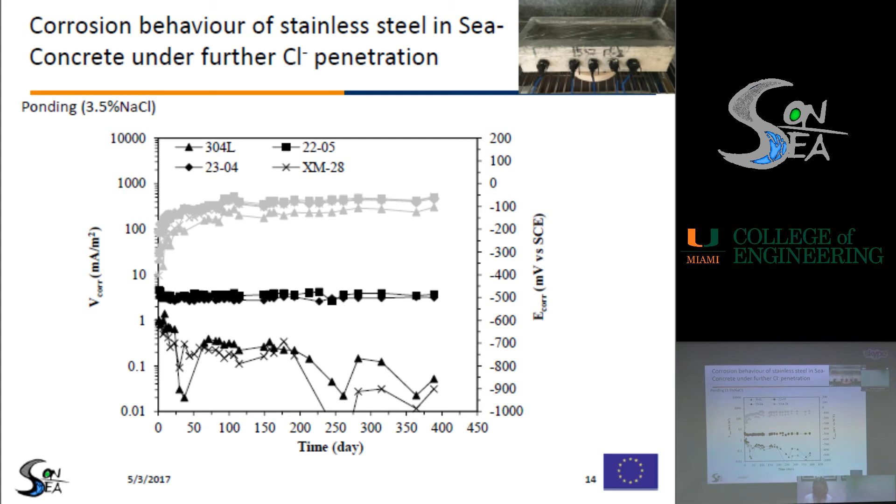So, to conclude, the tests aimed at studying the role of chloride-contaminated raw materials on the concrete transport properties showed that in the case of the mixes studied in this work, chloride contamination does not significantly affect the concrete properties. However, based on preliminary results, curing in seawater might affect the strength of concrete with the increase of exposure time.

Corrosion tests on reinforced concrete slabs showed that in absence of any further penetration of chlorides, as can occur for structures far from the sea, no corrosion was induced on any of the stainless steel bars employed in this study, even when 5% of chlorides were mixed in and when the slabs were exposed to the harshest environmental conditions. Conversely, carbon steel bars proved to be unsuitable in the harshest environmental conditions when embedded in the sea concrete.

The further penetration of chloride ions led to the initiation of corrosion on the carbon steel bar embedded in the different mixes, suggesting that the initial chloride content, due to the use of chloride-contaminated raw materials, was only slightly lower than the chloride content which promotes the initiation of corrosion, that is the critical chloride threshold, in the studied exposure conditions. The further penetration of chloride did not lead to the occurrence of corrosion on any of the stainless steel bars embedded in concrete made with chloride-contaminated material.

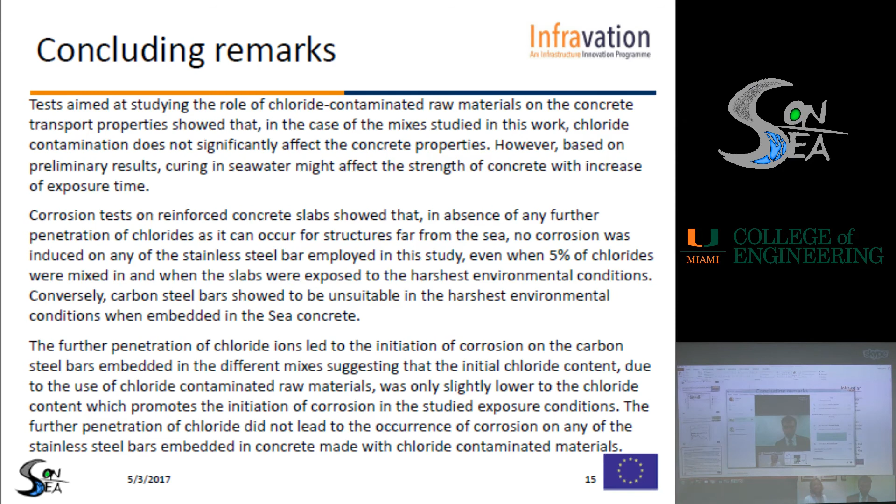I think we could move directly to Dr. Reda's presentation. I think it's going to be difficult for us to ask questions and expect them to reply. Okay. Good. I think the best is to ask them to continue. So I guess you heard us, right? Did you hear us? Okay, so we can just keep going with the WP4. Elena can take over. Thank you so much. You can stay where you are. We will team up.

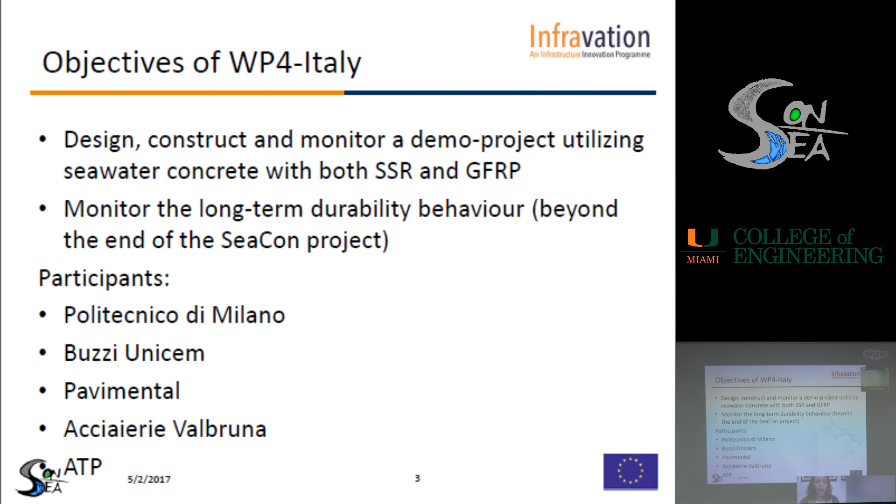The site that was chosen is an asphalt production unit of Pavimental located in Pontenure, close to Piacenza. This site is close to the A1 motorway, at the exit of Piacenza Sud, in the northern part of Italy, about 80 kilometers south from Milan, so not too far away from Milan.

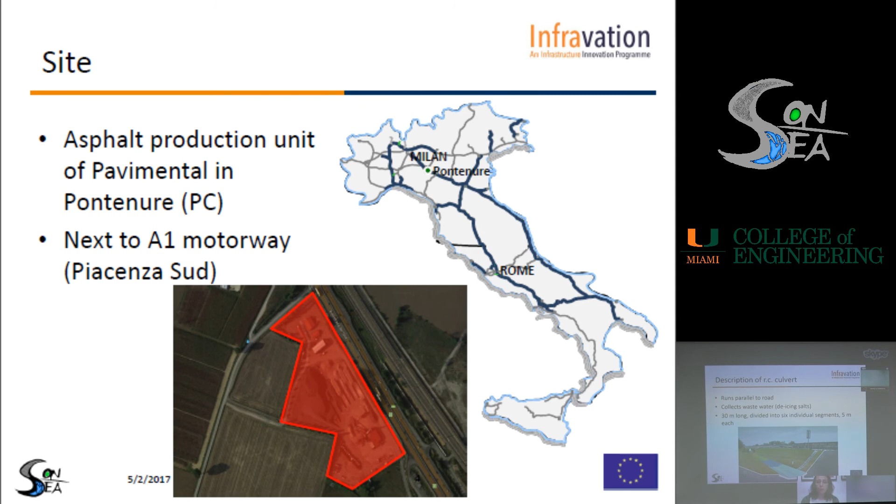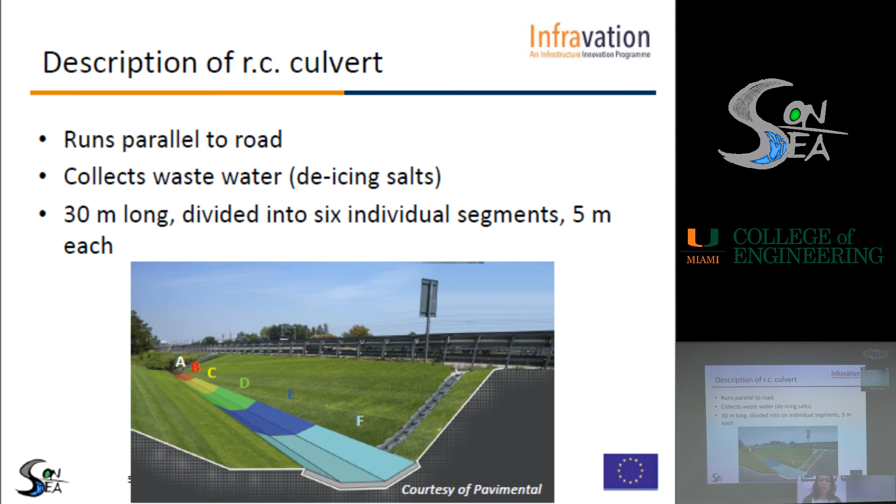The structure that was built is a reinforced concrete culvert that runs parallel to the roadway. Actually, it is only a few meters away from the road, and it collects the wastewater contaminated by chlorides, at least during the winter season when de-icing salts are used on the road. Overall, the culvert is 30 meters long, and it is divided into 6 individual and independent segments that are 5 meters long each. Each segment is representative of a different combination of type of concrete and type of reinforcement, as we will see in a moment.

As I said, each segment is representative of a different scenario, a combination of type of concrete and type of reinforcement, as summarized in this table. Segment A is a reference, carbon steel reinforcement in chloride-free concrete. Then segments B, C, D, and E are all made with seawater concrete and contain respectively carbon steel reinforcement, stainless steel 304, an austenitic grade of stainless steel, 2304, a duplex stainless steel, and finally GFRP reinforcement.

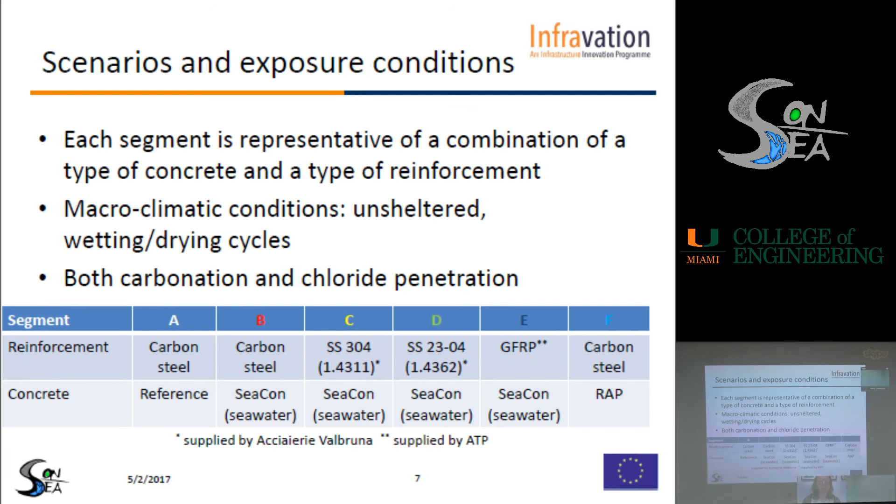So basically there are 3 different concretes: the reference concrete, the SeaCon concrete that is the same as reference but contains seawater instead of fresh water, and finally the RAP concrete that contains, as I say, the partial replacement of recycled asphalt pavement that comes from the same plant of Pontenure where the demo project was located.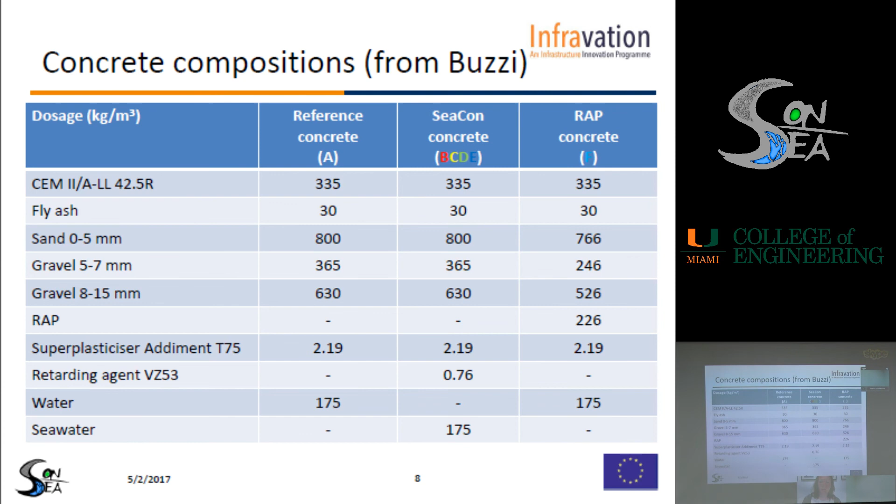The aim of our activity is to monitor the corrosion conditions of the reinforcement in order to detect the possible initiation of corrosion in time. And to do this, we used different types of probes. First of all, we used a reference electrode of the type silver-silver chloride that is used for potential monitoring.

Then we also designed some multiple reinforcement probes. Each one contains all the 3 different types of reinforcement, carbon steel, stainless steel of the 2 different types, and also an additional reference electrode made with titanium. And the aim of this multiple probe is to allow to simulate all the possible combinations of concrete and reinforcement, even the ones that could not be achieved for practical reasons.

And finally, we used also a resistivity probe that allows to measure the electrical resistivity of the concrete. All these probes were embedded inside concrete next to the reinforcement, so at the same depth of the reinforcement, at the same depth of the concrete cover.

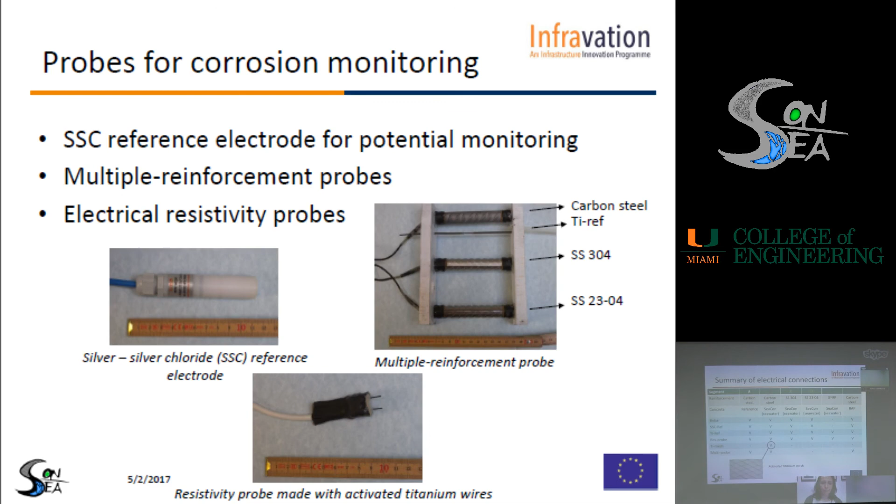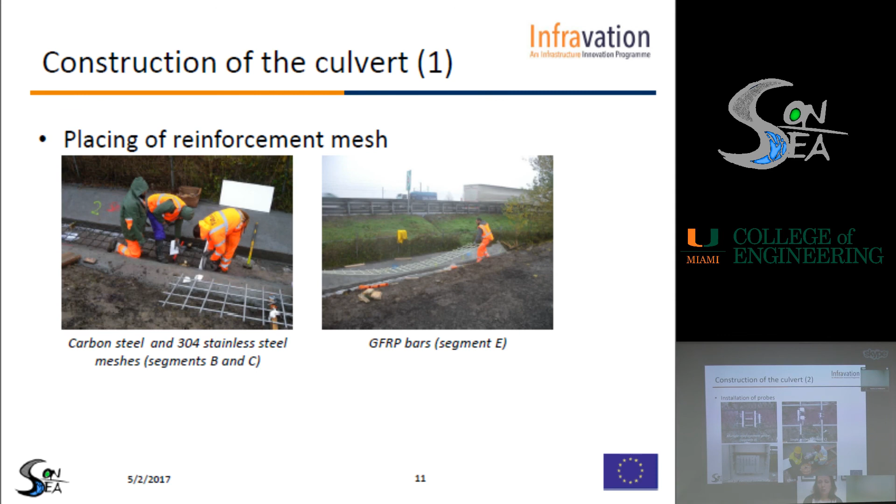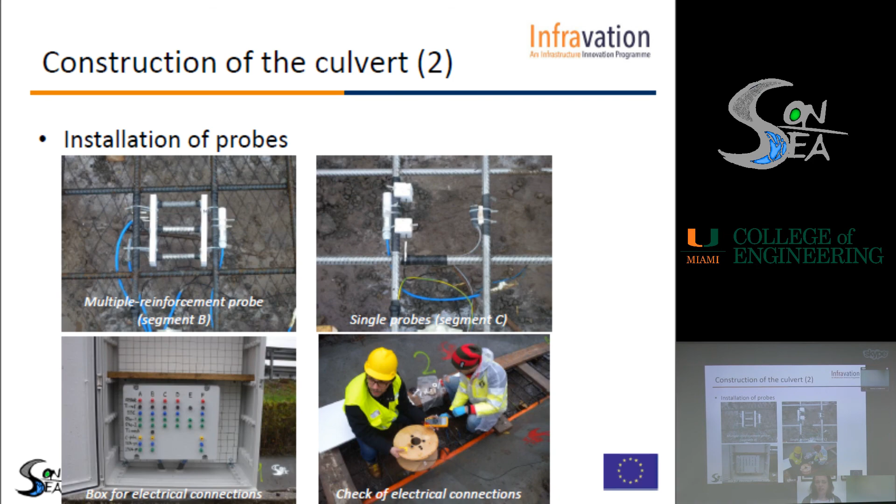And of course, before casting, we checked that all the connections were working properly, and they were, at least in the beginning. Then the concrete was cast in 3 different batches, and it was compacted through vibration and cured by covering the surface with a waterproof foil. It was a very rainy period, the time when this demo project was built.

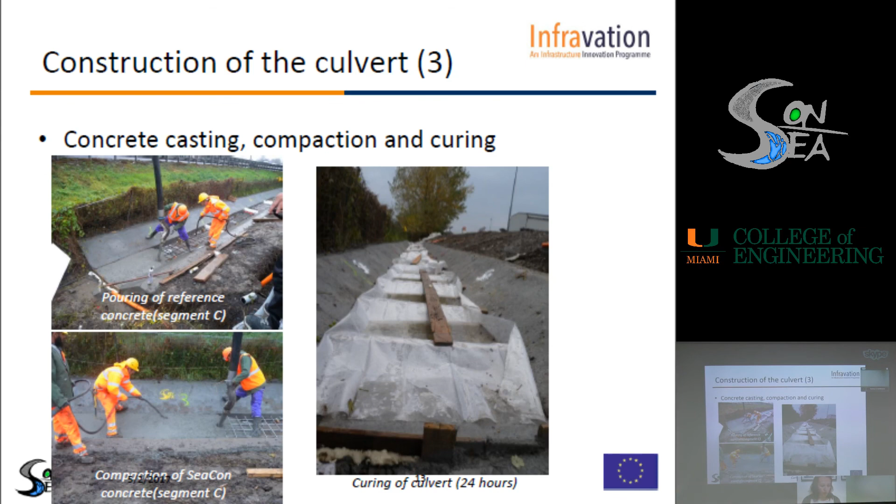Now I will describe the methodology that we have used so far, both on site and in the lab, in order to monitor the corrosion conditions of the reinforcement. Well, first of all, we measured regularly the potential of the reinforcement and the electrical resistivity of the concrete. So far, these measurements were done manually because the data acquisition system that we had planned to use is not ready yet.

So we performed this measurement manually more or less once a month in the last 5 months of service. Then after 5 months, which is basically last week, we also made a potential mapping. So we measured the potential of all the grid in each segment with respect to an external reference electrode.

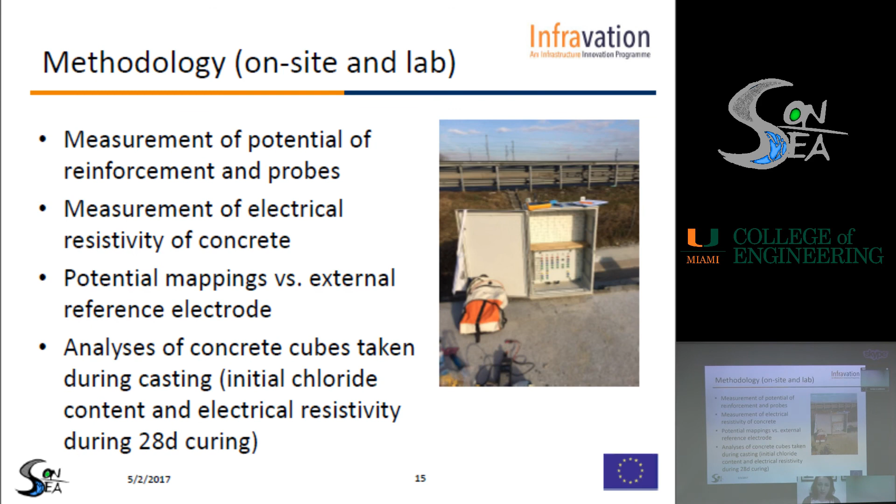And finally, we also performed some analysis on some of the concrete cubes that were taken during casting. In particular, chloride content. However, I will not discuss this today because we had some strange results that we are still going to clarify. And also we measured the electrical resistivity during the first 28 days of wet curing of the cubes.

These are the results of potential monitoring, and in particular, these are the potentials that were measured with respect to the embedded silver chloride reference electrode.

On the left, the potential of carbon steel in reference, seawater and RAP concrete, and on the right, the potential of the 2 types of stainless steel in seawater concrete. We can see that in all cases, the potential was rather low in the beginning, and then it showed an increasing trend. After about 5 months, we can see that all the potentials are quite high, and in particular, all

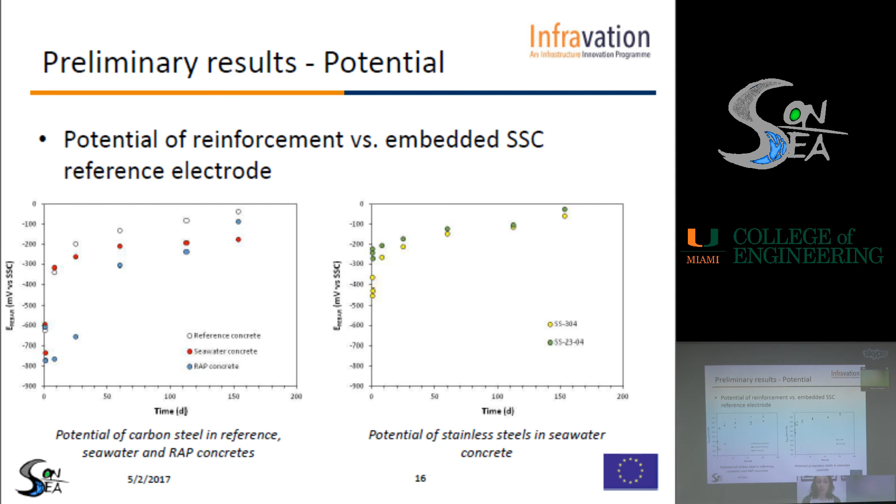the potential of carbon steel in reference and RAP concrete and also stainless steel is higher compared to minus 100 millivolts. Only the potential of carbon steel in seawater concrete is about minus 200, which is quite lower compared to the others, but still is a relatively high value of potential. What we did so far was to compare these results with the ones that we obtained from the laboratory specimens in similar exposure conditions, and we can see that there was a good agreement between the two.

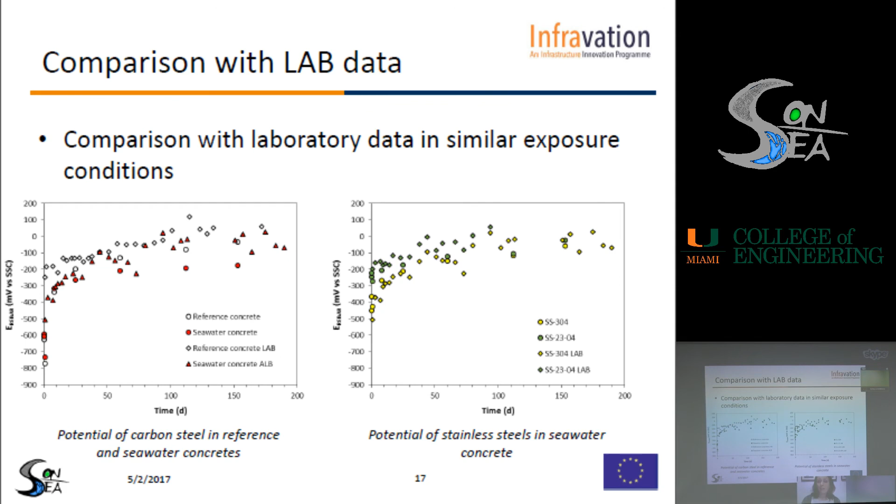Of course, it is quite difficult to interpret these results. They need to be monitored for longer periods of time. But because of the relatively high values of potential, we can assume that both carbon steel in reference concrete and also the two types of stainless steel in seawater concrete are not actively corroding. At least they are not yet actively corroding.

These are the results of the electrical resistivity of concrete, on the left on-site, and on the right on the concrete cubes in the laboratory. On-site, we can see that there are some variations in the resistivity, and in particular, we can see that the resistivity of the reference concrete and the RAP concrete were more or less always lower compared to the resistivity of seawater concrete. And this is quite strange because the contamination with chloride is expected to decrease the resistivity.

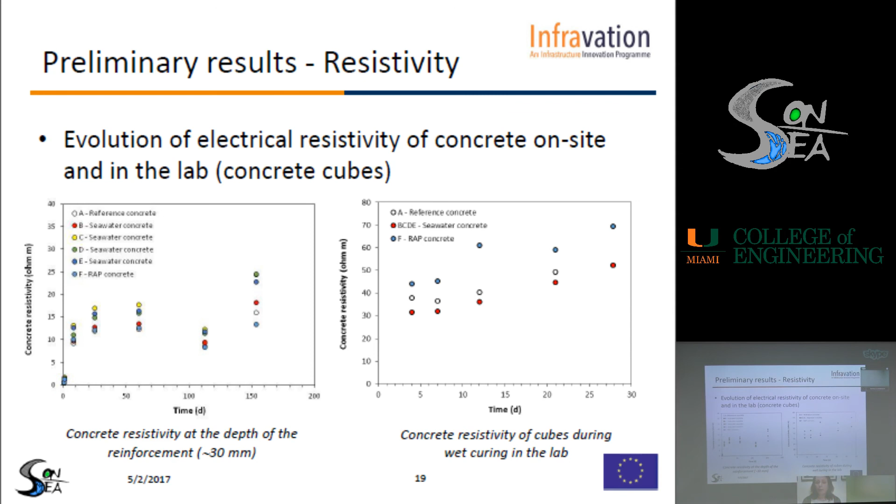However, we should consider that on-site, of course, there may be the penetration of chloride, although it is unlikely that chlorides have penetrated the concrete up to the depth of the reinforcement, that is 30 millimeters. There may be also other factors that can affect the resistivity, like, for instance, the local conditions of humidity, the temperature, and so on. And in fact, when we measured the resistivity in the laboratory on the cubes, we obtained that the resistivity of seawater concrete was always lower compared to the resistivity of reference concrete. Of course, also these parameters need to be monitored for longer periods of time in order to be better interpreted.

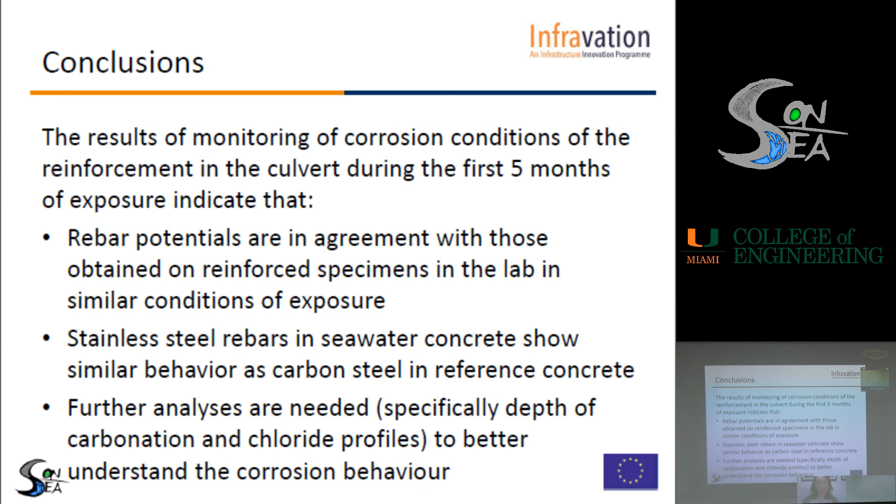So the conclusions of my presentation are that the results of monitoring of the corrosion conditions during the first 5 months of exposure indicate that the rebar potentials are in agreement with the ones that we obtained on reinforced specimens in the lab in similar conditions of exposure. Stainless steel rebars in seawater concrete show a very similar behavior as carbon steel in reference concrete, and we can assume that they are both not corroding yet. Further analyses for sure are needed, specifically the measurement of the depth of carbonation and the chloride profiles in order to better understand the corrosion behavior.

For the future activities, of course, we plan to go on with monitoring the potential and the resistivity, hopefully with the data acquisition system, and to analyze the chloride profiles and the advancement of the carbonation also in the sacrificial cubes. And finally, we also need to define suitable tests in order to investigate the behavior of GFRP rebars.